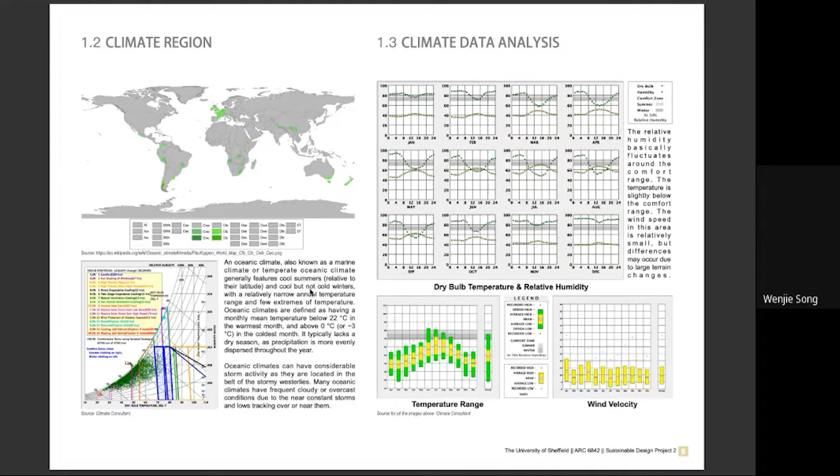We did a study about climate prediction in the future, and the general temperature had a tendency to increase by 3 to 6 degrees here. So climate change would be a big concern of our project.

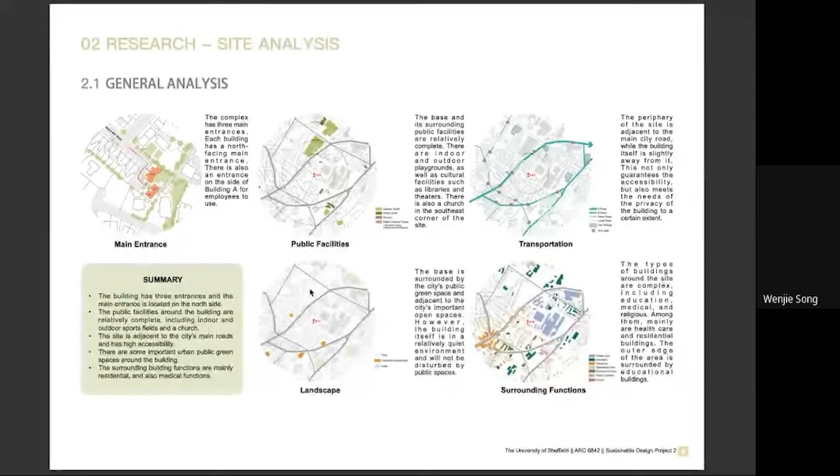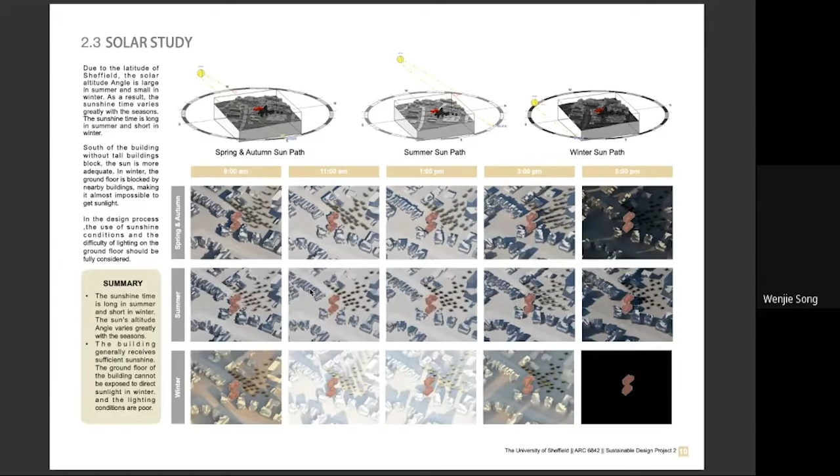Here we did some analysis about our site to help us better understand our location. Here is the ventilation condition, the wind condition of our project, and here is solar radiation. By this we can say that there are no high-rise buildings around our site, so solar energy could be used in our project.

Our project is very special, as it's for special people with long-term mental health needs. So we did some background study about mental health problems, and we can see there are 3 special needs for these people: the first is safety and socializing, and also comfort needs.

To better understand our residents, we did a daily routine analysis of our residents, so that we can better understand their daily activities in this way.

Here is a questionnaire done by MSc students, so we analyzed the questionnaire and summarized some problems in our project, such as the office being quite dark, and noise from students nearby needing to be solved. We also learned that decoration style may affect their health, so we also did a color study in this term.

Here is a solar radiation simulation of our project, and we can see that the north facade also can receive enough solar energy in this way. Our house has a quite high energy consumption originally, so this has to be changed in our project.

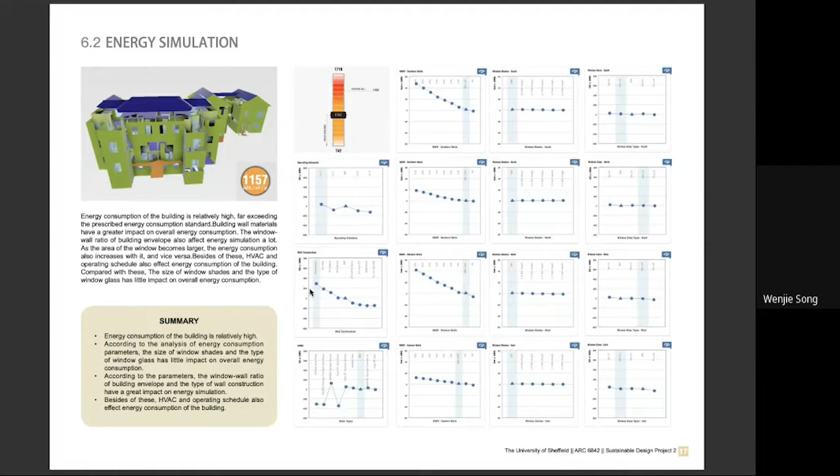Here is the daylight factor and the illuminance. We can see that the inside space of our building was quite dark.

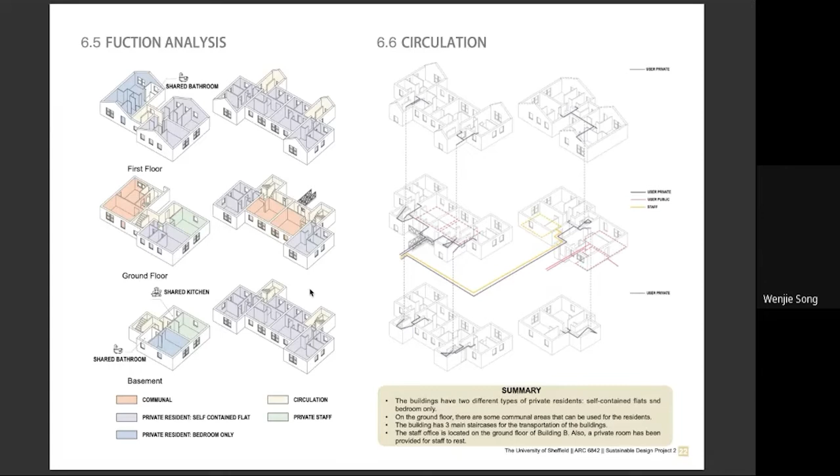Here is the function analysis. The house was built several years ago, and the function was quite simple, but the circulation was quite complicated, which is not suitable for people with mental health problems.

We also analyzed the structure because we plan to change this a little bit.

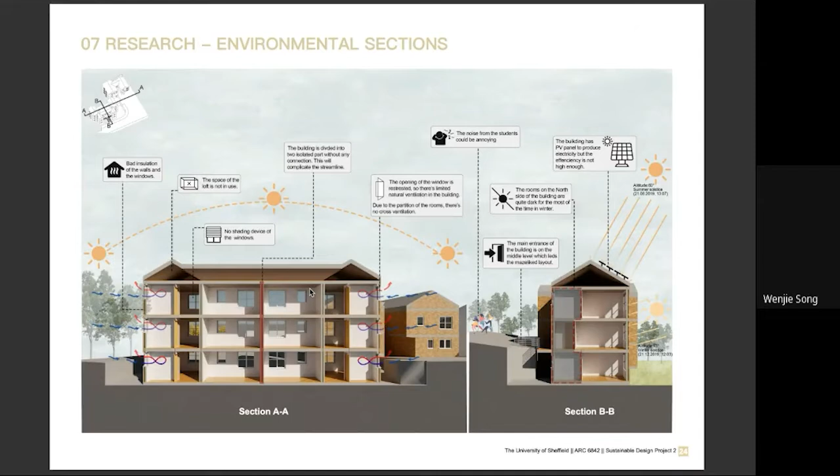Here is a summary of our building. We can see there are several problems: the building is divided into two separated buildings so people cannot go from one building to another directly, there's bad insulation of the walls and windows, and also no shading device on the windows, which would be terrible.

There is another section of our building, and these problems could be changed in our project.

So here is our SWOT, as I said before.

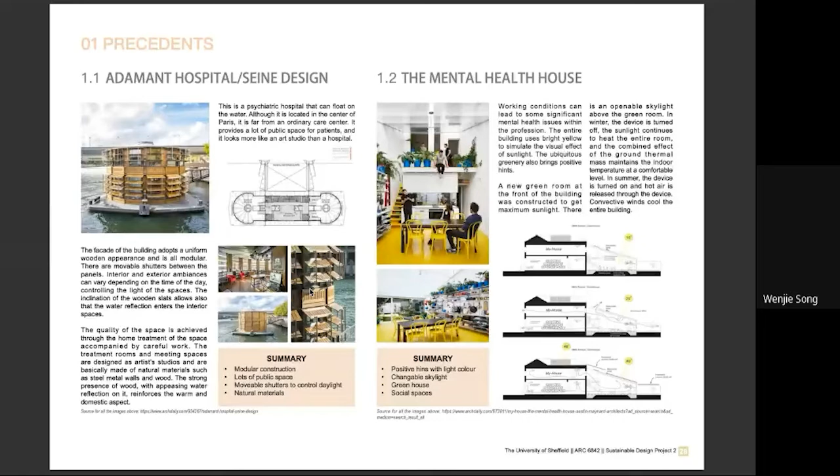We did some case studies about buildings for mental health people, and also some passive house studies. We selected BREEAM as a benchmark for our project because it combines energy, health, and some other factors in its standards.

Our vision has 6 parts. We want to achieve thermal comfort, improve indoor daylight quality, and increase variety of communal spaces, because people are encouraged to communicate more with others. We also want to achieve low energy consumption targets, ensure ventilation with safety, and finally improve water efficiency.

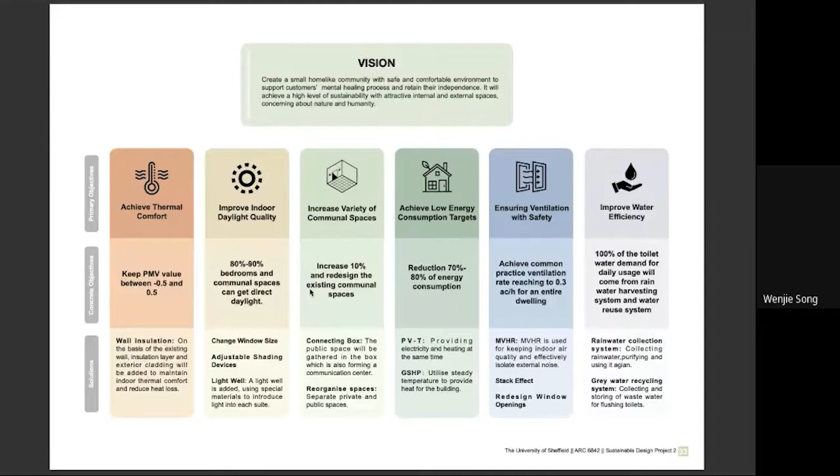Here goes the overall solutions of our project. First, we made some visual changes to our project - we added some steps and ramps on our site to make our buildings more accessible. For our layout, we also made some key point changes.

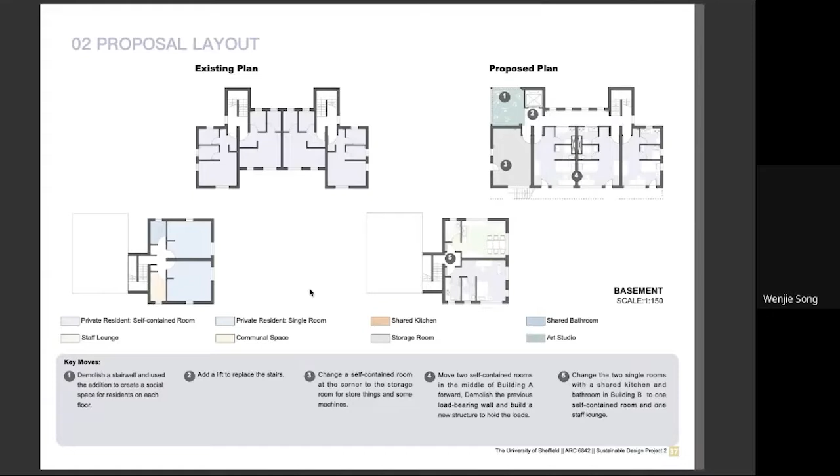For the basement, we added a storage room to store some medical machines and other things. For the ground floor, we added a glass connection box to make sure people can go from one building to another very conveniently.

For the first floor, we added some communal spaces, and we demolished the stairs of Building A, the top building, adding a lift instead. We also increased the number of self-contained rooms because of the total increase in number of residents.

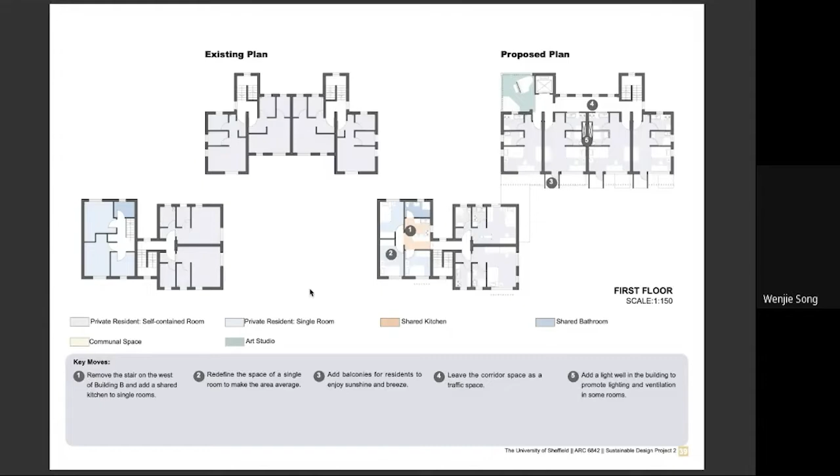Here goes a section. We can see that our building is located on a slope, so there may be some height difference between the two sides of our building. This may be an opportunity for our project.

Here are our potential solutions for our building. We want to add some insulation to our building envelope, and also add a light well in the middle of our building to bring natural ventilation.

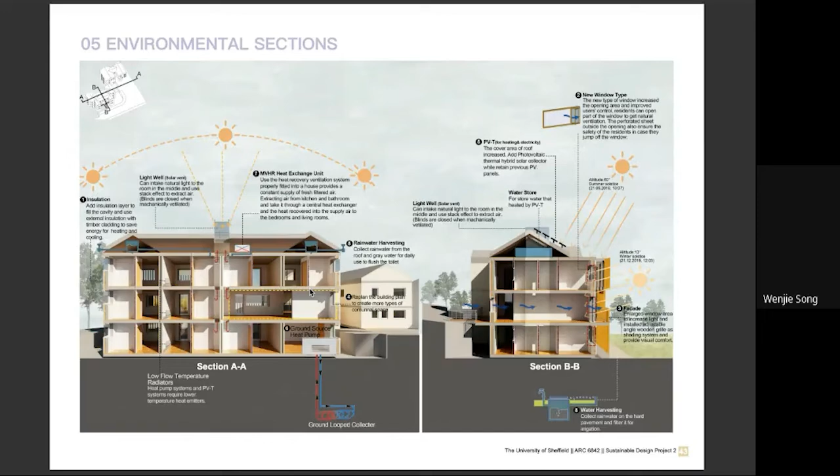We also want to introduce an MVHR system to encourage natural ventilation in our building, and a rainwater harvesting system to better reuse water. We also add some PVT panels on the roof to better use solar radiation. Now I will talk about our solutions in detail.

First is about insulation. We added insulation to our building, and we also selected to use a double facade in our building. We selected timber as the main material of the double facade.

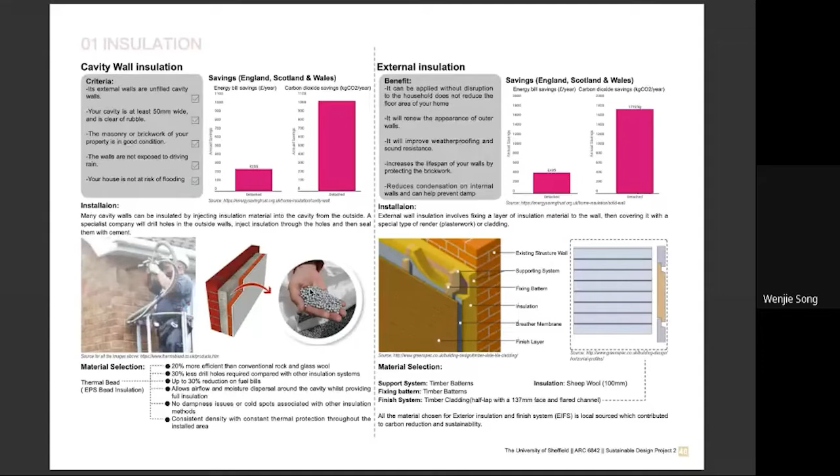Due to the climate prediction for Sheffield, general humidity would increase by 2050. So we changed the shape of the double facade a little bit to better prevent moisture in this project.

We also selected a new window type. We changed the original double glazing to triple glazing to better prevent heat loss and improve air tightness.

We also added a window box outside the building, with some small holes so that people can see each other from their own homes, to greet each other and communicate with others.

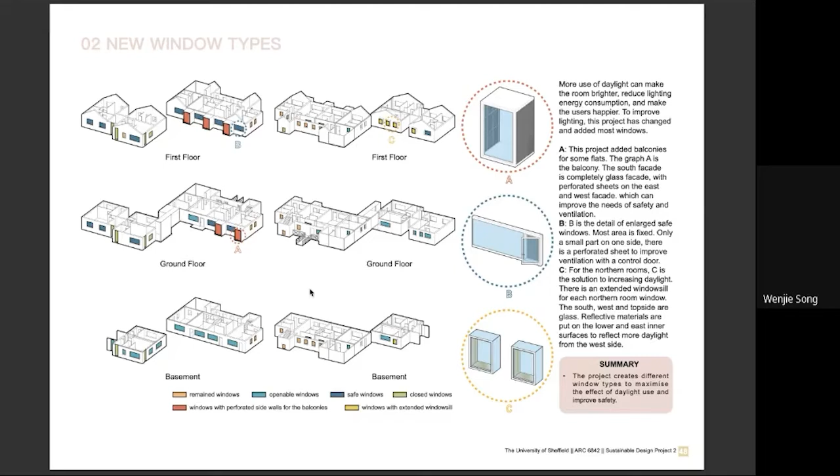We also introduced an adjustable timber shading system. By applying this system, people can adjust the angle of the shading themselves depending on their preferences. This is a detailing of this shading system.

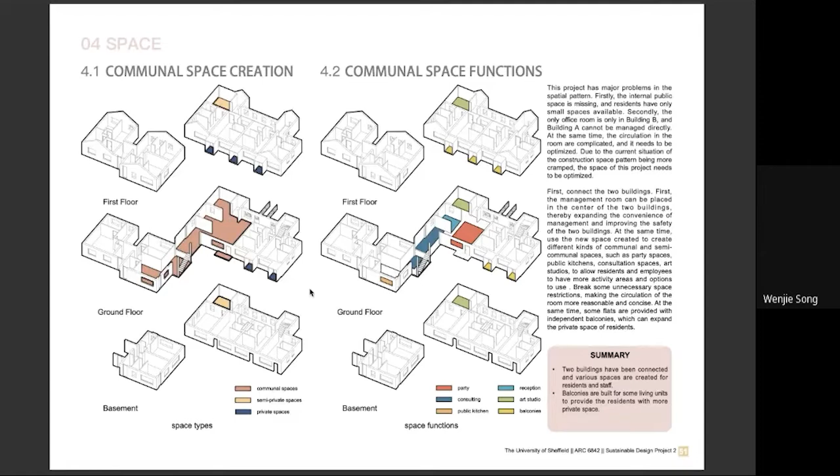For space, we added some communal spaces such as the middle connecting box, and we demolished the stairs because there are 2 stairs in our building, and we think lifts are more convenient for people with special needs. We also added an art studio in the north building, because we learned that artworks may be helpful for their mental problems. Here is some sketch about the public spaces.

For structure, because we added some big communal spaces, we changed the structure a little bit. We demolished some load-bearing walls, and instead added some columns and beams to bear loads.

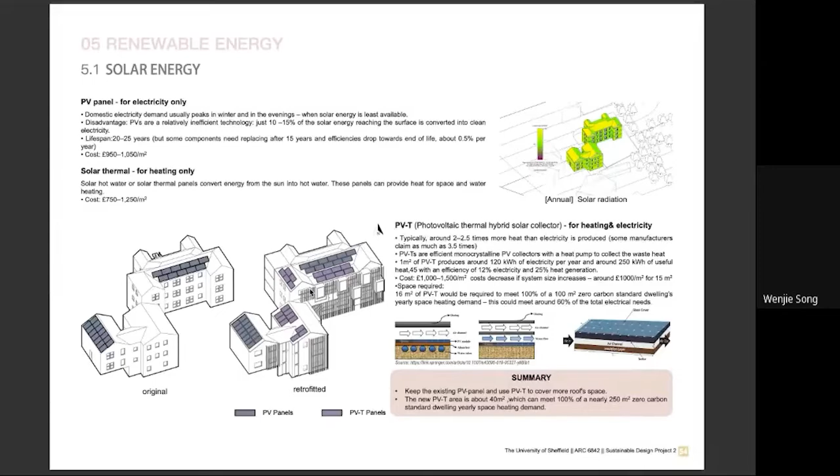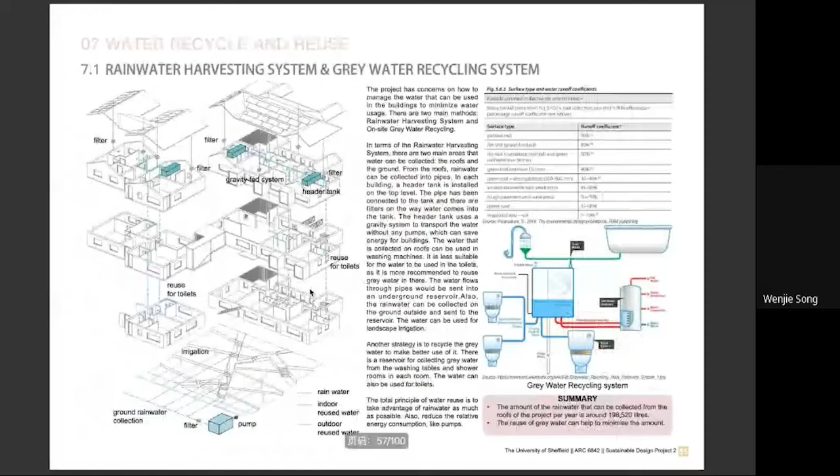Regarding renewable energy, first we considered using solar energy, because the orientation of this project was quite good and there is no shading around our site. So we added some PV panels on top of our roof, and also added a ground source heat pump, located under our garden. We also want to introduce the MVHR system to encourage natural ventilation, and apply rainwater harvesting and grey water recycling systems to better reuse water.

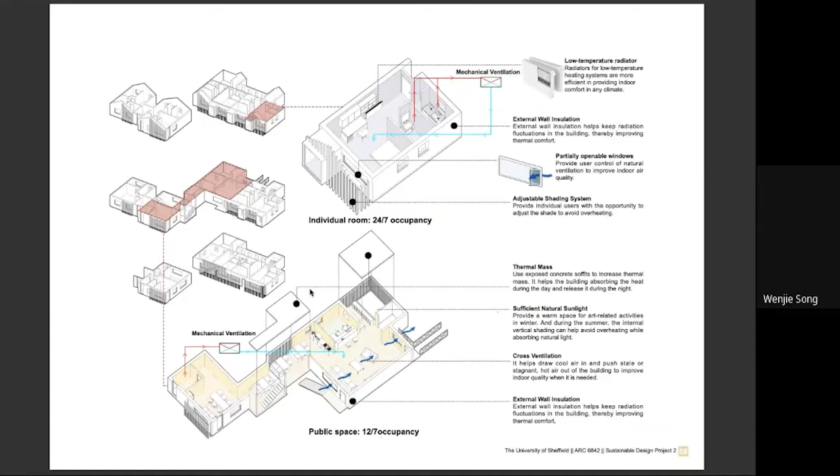For thermal fields, we prioritize the self-contained spaces, because residents would spend most of their time in their own rooms, followed by assistant spaces such as the shared kitchen, offices, and toilets. We added mechanical ventilation and increased insulation to improve indoor thermal sensation, and we also designed an artificial lighting system for our project.

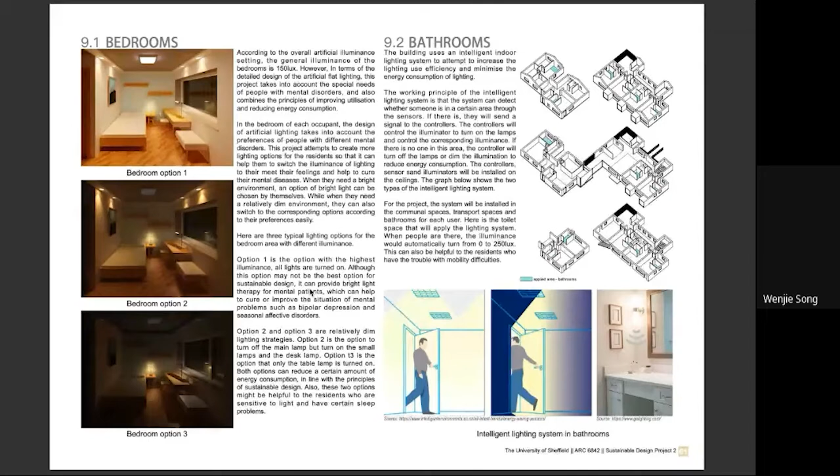As well as thermal fields, we prioritize important spaces in this building, such as the toilets, kitchen, and assistance spaces, to reduce the danger of using these spaces. In special spaces, such as the bathroom, we use an automatic lighting system so people don't need to operate it themselves, which is convenient for people with mental problems. For other spaces, we selected different types of lighting systems so people can select depending on their preferences.

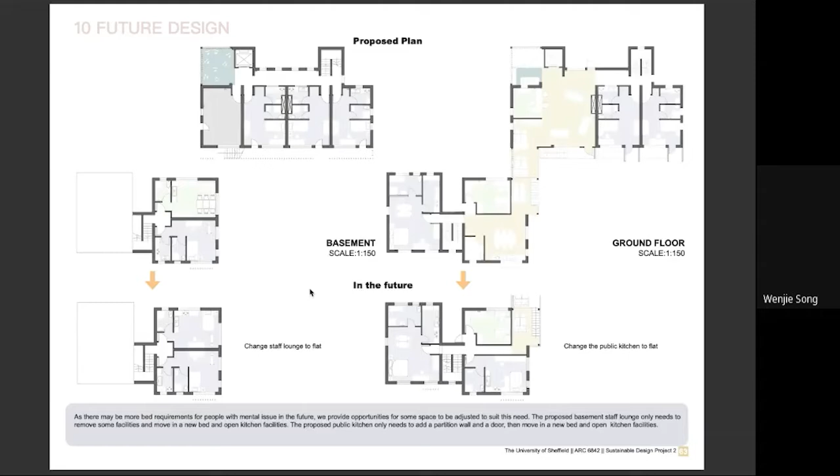We also considered future design because the total number of residents in this project was changeable. So if the number increases in the future, we designed some movable walls in this building so people can change the layout themselves to adjust to the change in numbers. We also plan to grow plants in the window boxes because of global warming and rising temperatures in the future, so these plants could prevent heat very well.

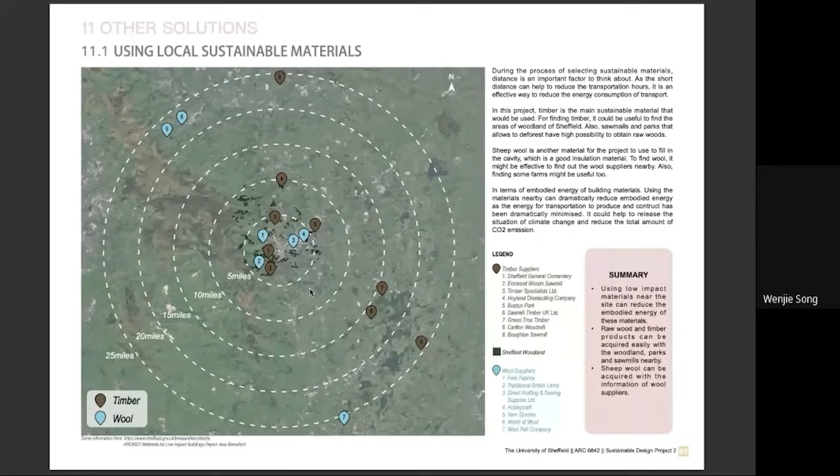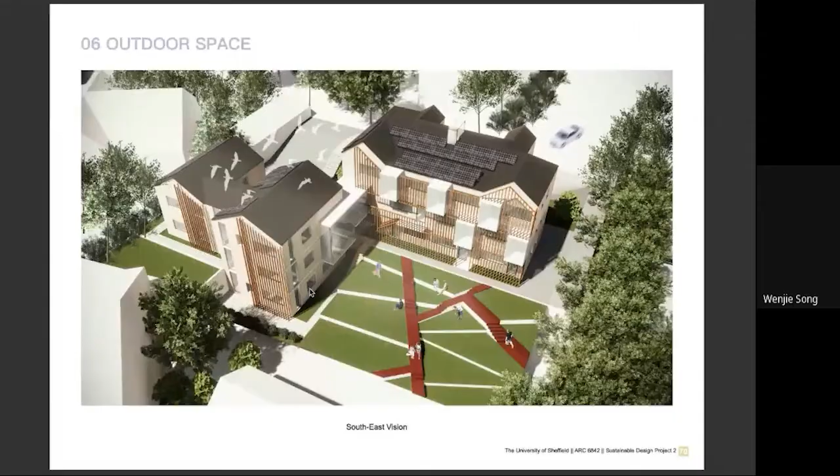Here are some visual renderings about our building. Here is the south facade, and here is the garden and the connecting box.

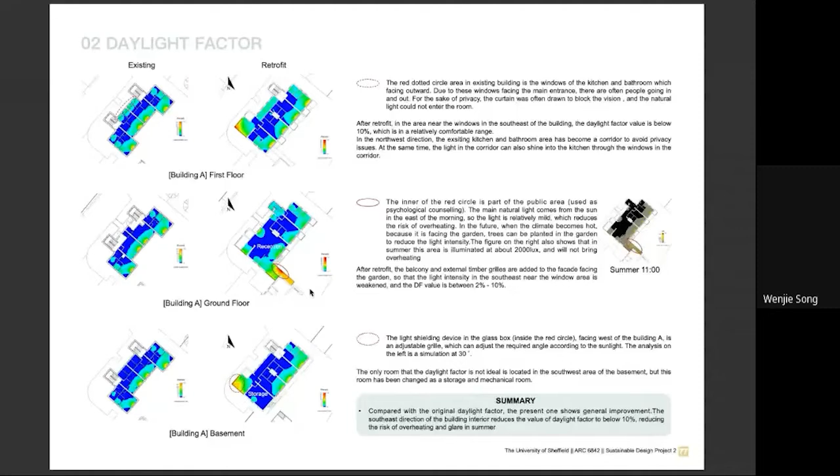After applying our solutions, we recalculated our energy consumption, and it's now reduced to 213, meeting the standard of Architecture 2030. The daylight factor has improved a lot, especially on the south side, as well as illuminance.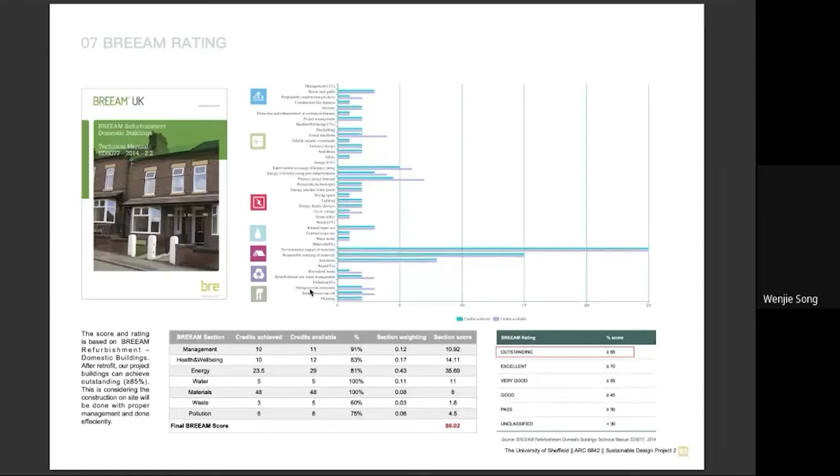We also did the BREEAM rating, and our project scored outstanding. Besides this, we also wanted to achieve the Passivhaus standard in our project. We did a lot of things, especially selecting the window and door types to improve the airtightness of our project, and we tried our best to reduce thermal bridges in the building envelope, especially at the corners of the wall.

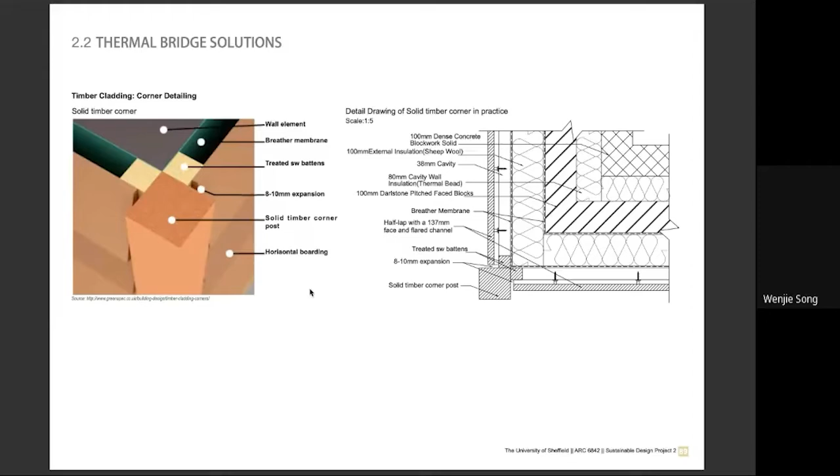We simulated our building in PHPP software, and our building finally achieved and met the standard of Passivhaus, because our house was a retrofit project - the Passivhaus standard for this was 25, and our final score was 19.8. So here is our project. Thank you very much.

Thank you, Wenjie. That was an interesting project. It was a fantastic insight into the breadth of the project you undertook and the process.

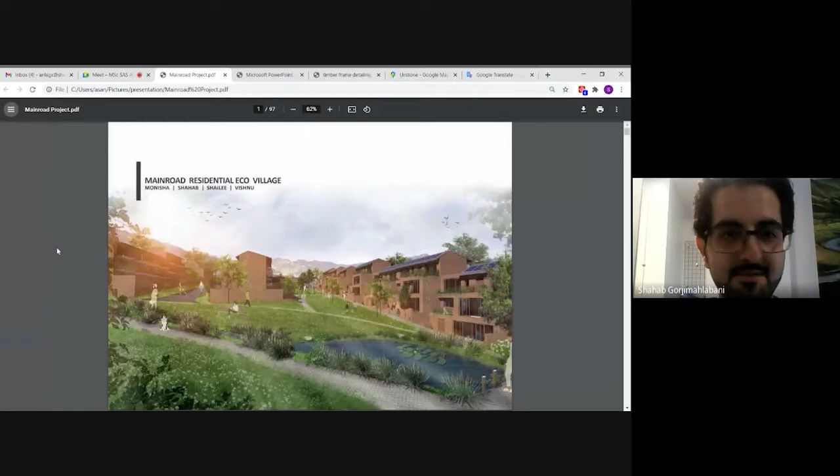Yeah, I hope you can see my screen. Yes, we can. Okay, so hello everyone, I'm Shahab, and I'll be joined by my friend Vishnu in presenting the Main Road Residential Eco Village. I'm really happy to join this session, and I hope we can transfer what we've learned throughout the project to everyone present. Just to point out, we've summarized the presentation so we could present the relevant parts, and we've omitted some parts from our project which we thought were not necessary for this presentation.

As Celine pointed out, every design in the SAS studio starts with the 7 steps to sustainability, which starts with research and looking at the background of the project, then going into the vision and objectives - what we are aiming to achieve. Based on that, we go into the solutions, the design, and the strategies, and finally we validate those strategies with physical models or simulations. We end all of that with feedback from the real project, if it is built, and from the users, in order to incorporate it into future projects.

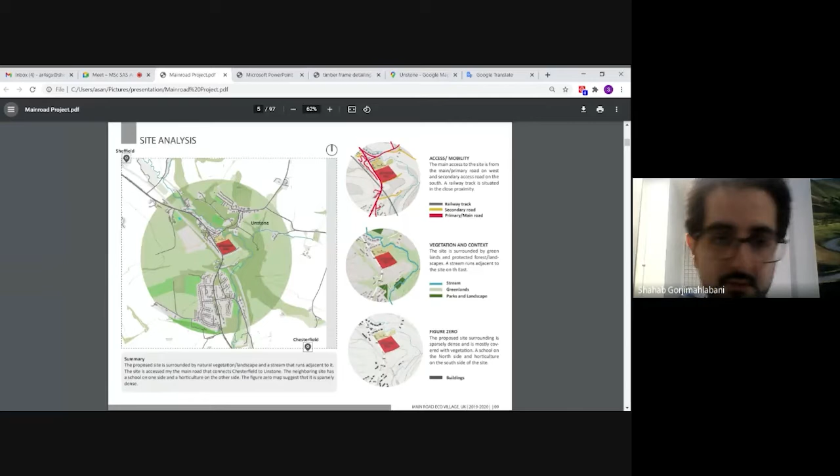We did some site analysis looking at the shading and the wind on the site. The main direction of the wind is from south to north, and also a secondary direction from southwest to northeast. The site also has two slopes, one from south to north and another from west to east with a drop of 12 meters.

These two points helped us with zoning the site, as you can see on the right. We divided the site into two parts of two segments, with a main axis passing through diagonally from the southwest to the northeast, with housing projects on the west and east sides, and also some public spaces next to the main road.

These are some views of the site. You can see the main road, the school, and also the view of the site here.

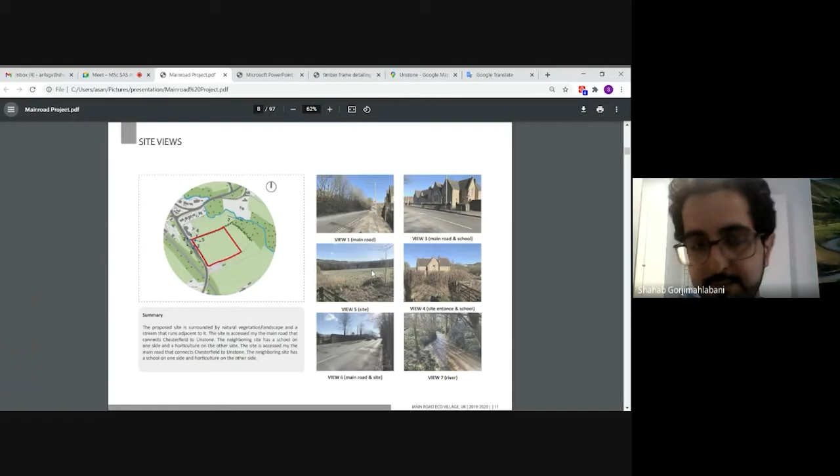The main vision of the project was to achieve a passively designed social housing community responsive to the context, which also enhanced the well-being of the users and promoted a sustainable lifestyle. Because the project is on an empty site, our objectives are divided into two levels: one at master plan level and one at the cluster and unit level.

All in all, we were trying to achieve an energy efficient site, which would enhance community engagement and also achieve sustainable goals such as water harvesting and waste management. We were also after good air quality, lighting, and thermal comfort inside the spaces, as well as good quality of spaces and good design.

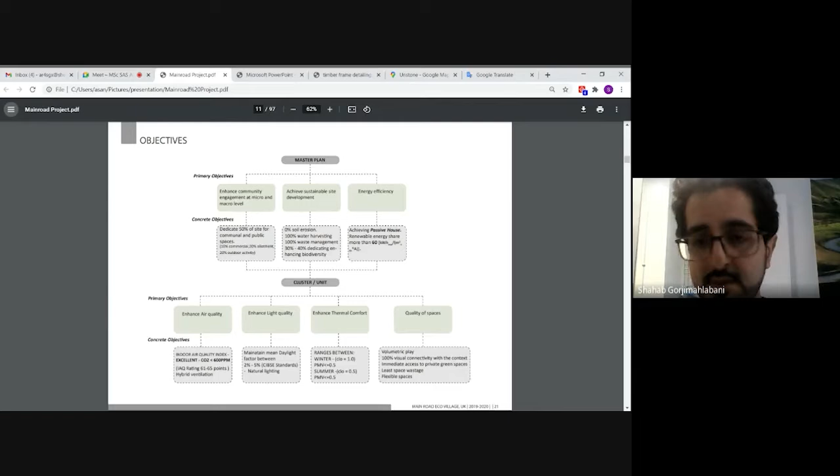I'll hand it over to Vishnu.

Before starting the design of the project, we went through a series of analysis about the kind of user group we're going to have and the community activities that would happen on site. We found out that we'll have families, couples, single parents, elderly people and single occupants, and then charted down all the activities of all the user groups.

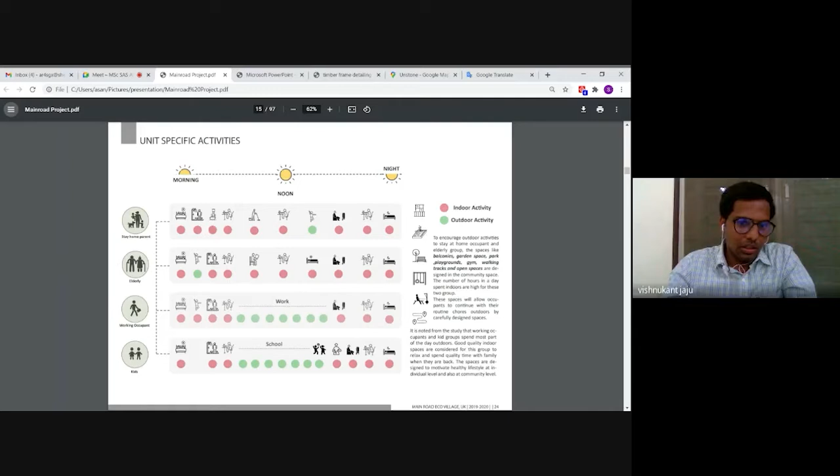We then did an activity analysis of all the users from day to night to understand the occupancy pattern. Going to the master plan, we initially started with vague ideas of how we can arrange the units around the site, since it was a slopey site, so we always had to take care of the diagonal valley we have in the site. We explored organic clusters, courtyards, straight rows, staggered patterns and earth sheltered buildings.

We then shortlisted three options. The first one being a very north-south oriented geometric arrangement, but it looks inorganic. The second one being straight lines. The third one being a combination of both, with organic lines on one side and inorganic clusters on the other side.

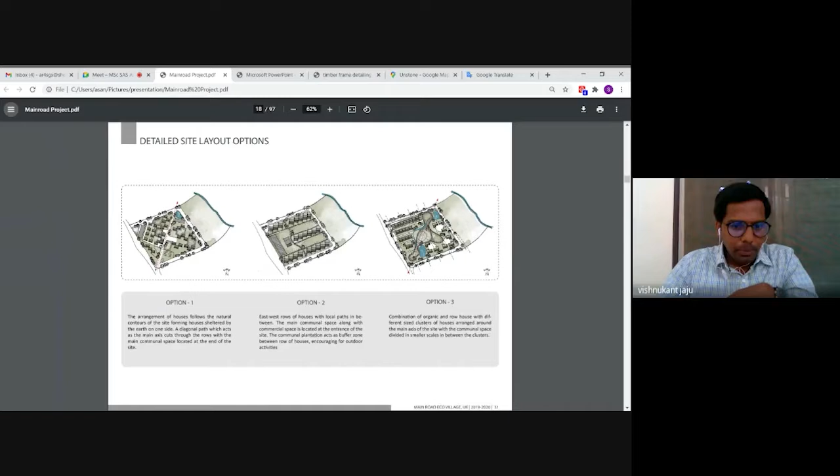We started detailing out the third one because it actually looked very interesting, and how organic and inorganic arrangements form the community space. We did an analysis of the advantages and disadvantages of both kinds of arrangements.

So that was the final layout. On one side of the diagonal, the diagonal axis became the open community spaces with the community center, and also the water body you see in the center is actually following the slope of the site, so that we are not doing any mechanical pumping of water to collect it. On the left, you see rows of houses oriented south-north, which are actually 1-bedroom and 2-bedroom units arranged one above the other. On the right, you see clusters of 3-bedroom community arrangements.

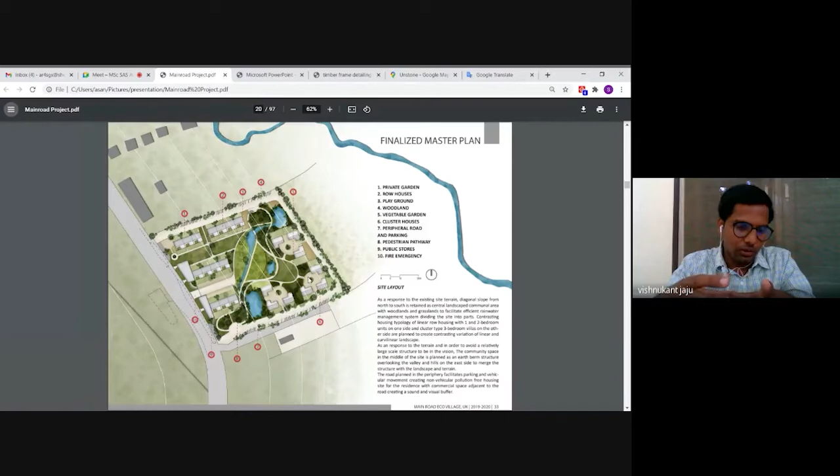That's the overall view of the site, showing how we've made parking all around the site and not in between the residential units, still having emergency access to each and every unit, and then orienting all of them to south and north so that we take advantage of the sunlight to generate electricity by solar panels.

Then, to understand how much area of the site we are using for various activities like wastewater management, rainwater harvesting, and woodlands that we are proposing on site, we did an area allotment. So we understand that.

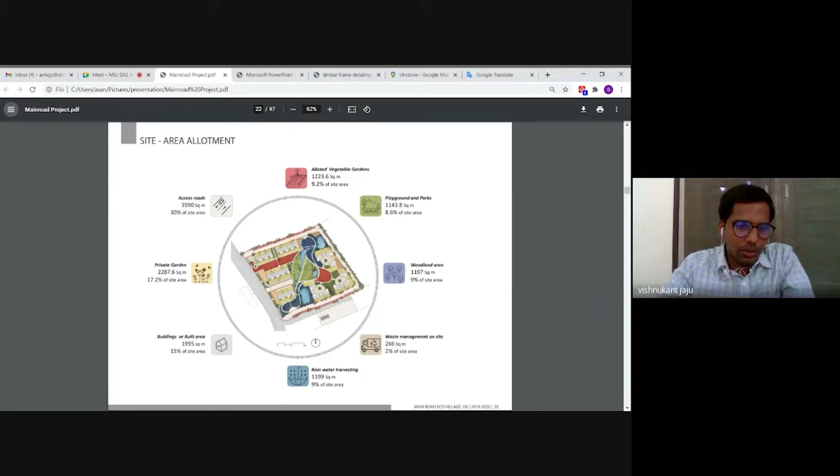That's again a detail of all the layout. Next, all the spaces in the layout.

For rainwater management, what we have done is it was 100% possible to collect all the water from the roof sheds. So we are collecting all the water from the roof of the building and putting them back into the earth by groundwater recharge units. And the centrally located swale that you see is actually following the slope of the site.

That's collecting all the water from the site. So in that way, we are trying to collect all the 100% water that we are going to get on site and pump it back to the earth, back to the ground, by using bioswales and very dry landscape in some areas which can retain water.

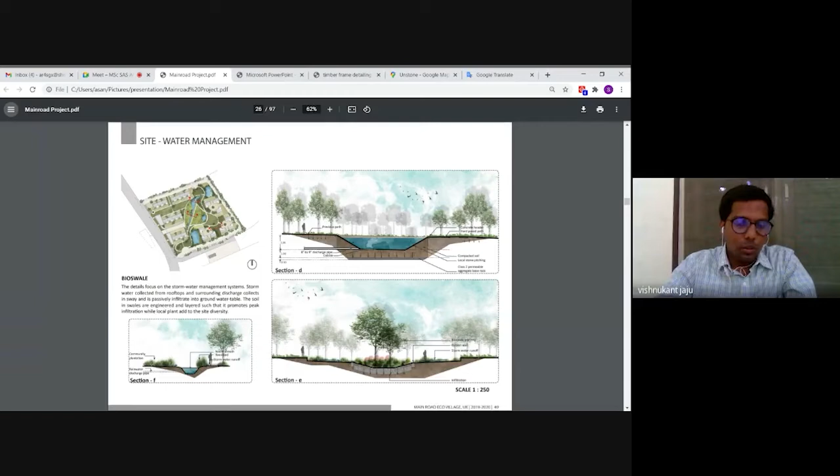You can see some detailed sections of how the swale is proposed and how the woodlands are proposed around the water body to avoid evaporation. That's a detail of groundwater.

On the right, and then in the lower section, you see the allotment areas in between the units, and how the water is again collected into the allotment areas.

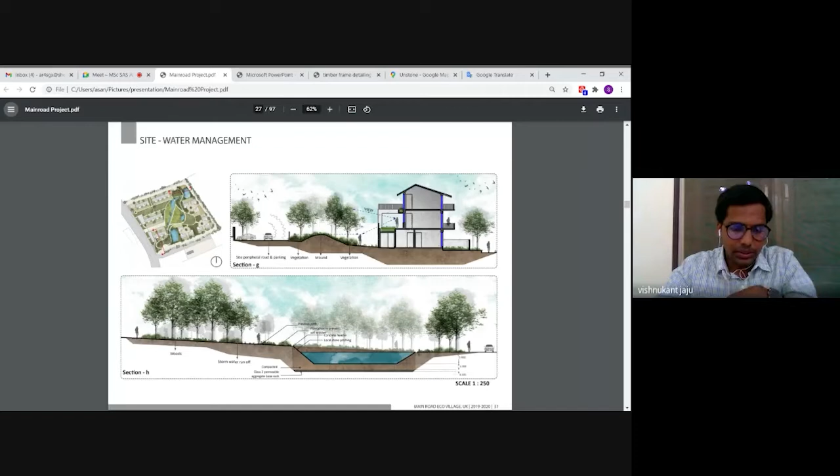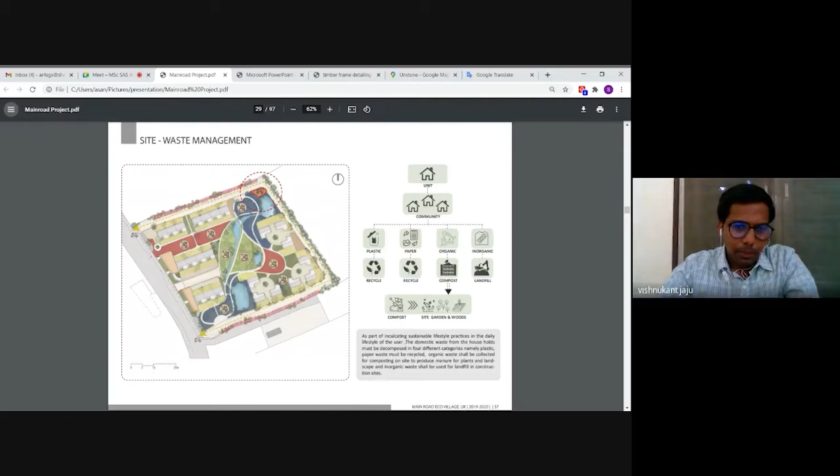Biodiversity in terms of the site itself is rich in the surroundings, so we have taken up local species of flowers and woodland trees and grasses and flowering trees, proposing them on the site, so that it grows healthily and we have a green seasonal site all along the year.

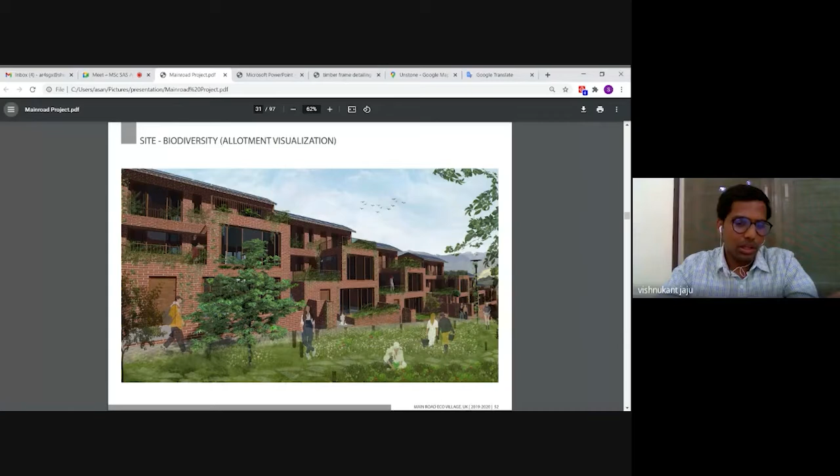Next, that's the view of the allotment and the row housing, how every building has an allotted piece of land in front of it, so that people actually use it to grow their own veggies and fruits, and also develop a sense of community in between the people.

We have gone ahead with the shape of the site without disturbing a lot of its geography. We've just gone ahead with taking the shape of the existing site.

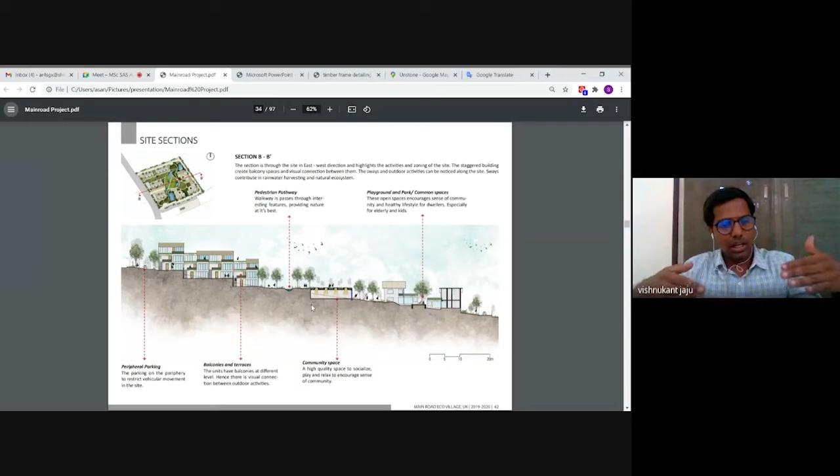What you see in the center is an earth shelter building, which is a community center overlooking the valley. So there is no structure visible when you're entering the site from the top - you don't actually see it. What you see is only residences, but you actually have a community space which is into the ground with skylighting and all of that.

This is a cross section in the other direction, where you see how we have placed the site at this particular location, so that the house behind actually receives sun all along the year, and also that helps in efficient functioning of the solar panels that we are using.

So the idea of going ahead with 3 rows was because we had to have this for 100% functioning of solar panels and to keep our spaces warm throughout the year.

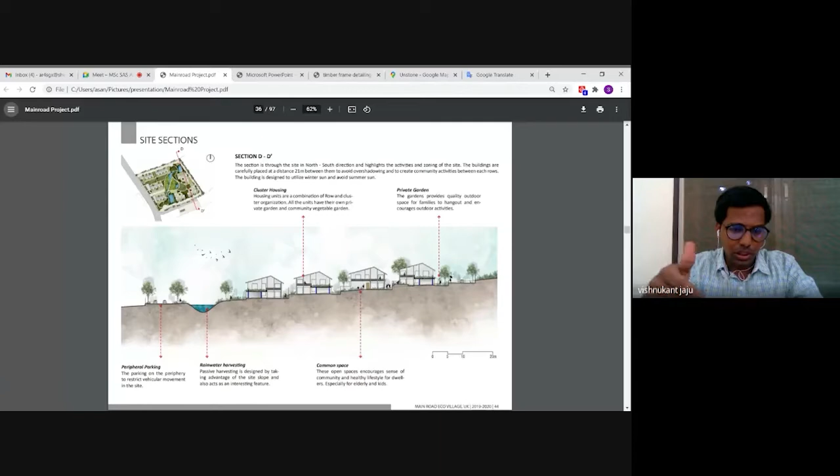Next, this is the cross section through the community clusters. Very straightforward - same, we followed the slope and swale. Go ahead.

A zoomed-in section of how we're trying to inculcate a sense of community between the people by having terraces overlooking the allotment areas, so that it becomes more social, and the sense of community is there because the architecture is creating it here.

Go ahead. That's the detail of the section of the community center, showing how we're doing a naturally lit earth-berm building. Go ahead.

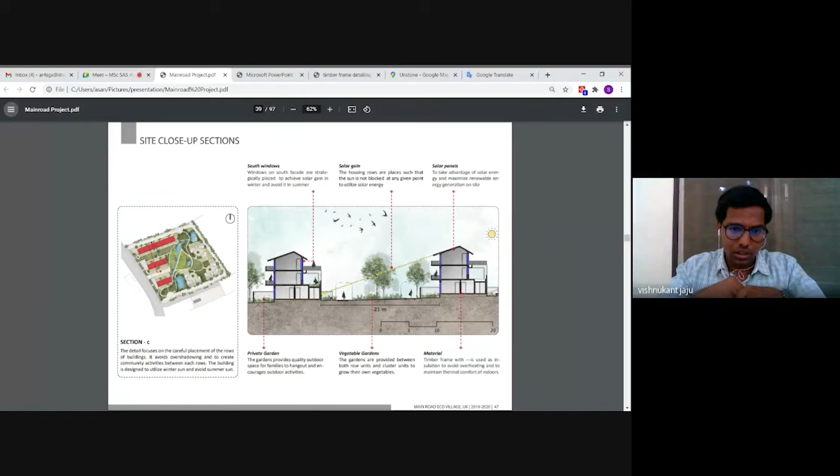Zoom in of how we've arranged the buildings for maximum utilization of sun and to keep the spaces warm, with windows and cross ventilation in the space.

So this is unit 1. Basically we are trying to play around with the form so that we could arrange everything around a cluster. It was all about scooping the spaces, having terraces overlooking each other, and how we have verandas and inside and outside space, also taking care of ventilation and natural light in all the spaces. This is a 3-bedroom unit.

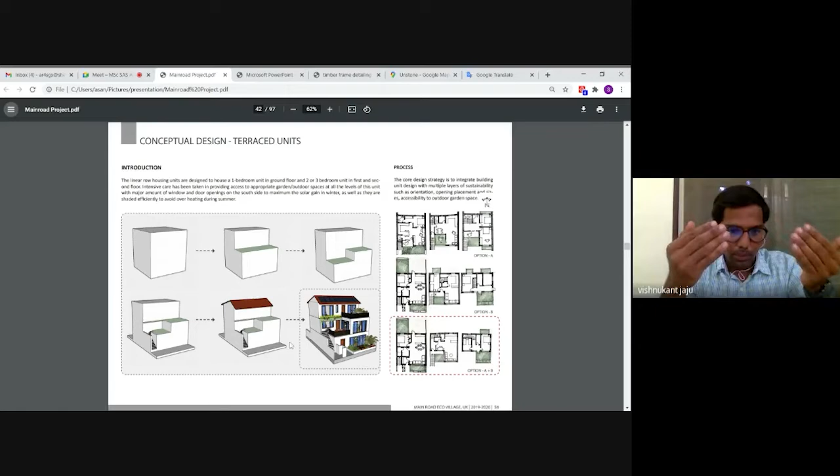This is unit 2, which has a 1-bedroom unit on the ground floor and a 2-bedroom unit on the 1st and 2nd floor, with an independent staircase going up. So we have 3 levels of terraces looking into each other, giving independent privacy on the upper levels, and the lower levels also have independent courtyards in the front and the back.

That's unit 1 with 1 bedroom on the bottom, two bedrooms on the top, stacked upon each other with a separate staircase and entrance.

That's the second unit, a 2-bedroom unit on top with two terraces, and sometimes 3 terraces attached to each other. What you see is a very simple, straightforward unit, but the real interest of the project is how we have done well ventilated, well lit, very simple planning, but amazingly functioning spaces, moving out into spaces and overlooking into terraces.

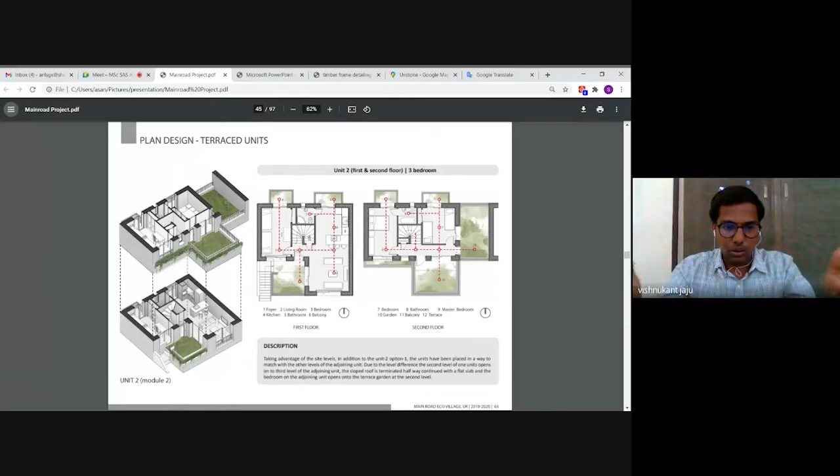Moving on into the details of the building. All of the buildings use a balloon frame system instead of the traditional system where the floor joists sit on the wall studs. In this system, the wall studs are continuous past the floor joists, and the reason we've used this framing system is we wanted to achieve air tightness throughout the building, and using this framing system makes the air tightness detailing much easier.

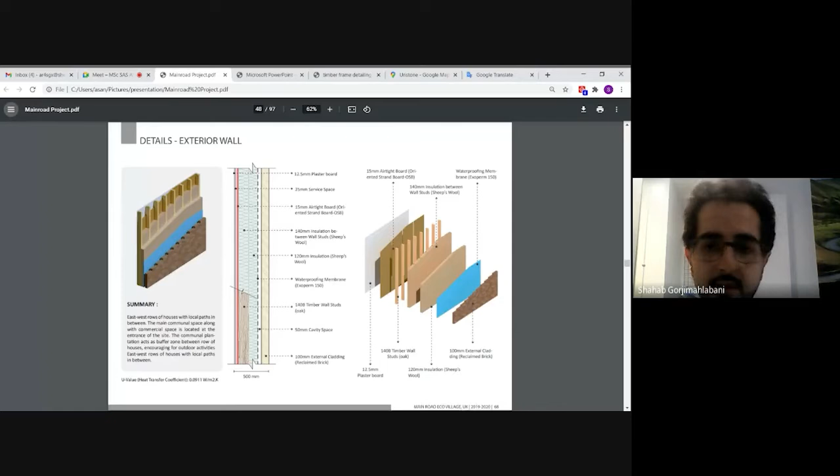The entire building uses a timber frame structure with timber trusses for the roof and clay tile roofs. Looking at the details of the exterior walls, we have 140 millimeter timber wall studs, filled with 140 millimeters of sheep wool insulation in between, and an extra layer of insulation on top in order to achieve thermal continuity. The most important part for thermal continuity and air tightness is the detailing of the joints.

So here, if you look at the foundation, it's a very simple foundation. It uses EPS insulation on the bottom and edge EPS insulation, which in addition to providing thermal insulation, acts as the shuttering for the flat slab used for the foundation. Here the floor slab and the foundation are combined, and the reason it is flat is because it helps.

It's easier to construct because these are small buildings and the workers used for these types of construction are not that familiar, not experts in very complex foundations. Also, using these EPS quick modules helps with the thermal continuity, attaching these insulation parts to the insulation of the wall.

And here you can also see that balloon framing system, where the floor joists are not disrupting the wall studs, which helps with the air tightness.

For the air tightness, we've used OSB boards instead of membranes, and the reason for that is membranes are harder to use, harder to achieve the air tightness with, and harder in detailing — you have to be very careful with creasing and not creating any holes. But with OSB, it's much easier to achieve that.

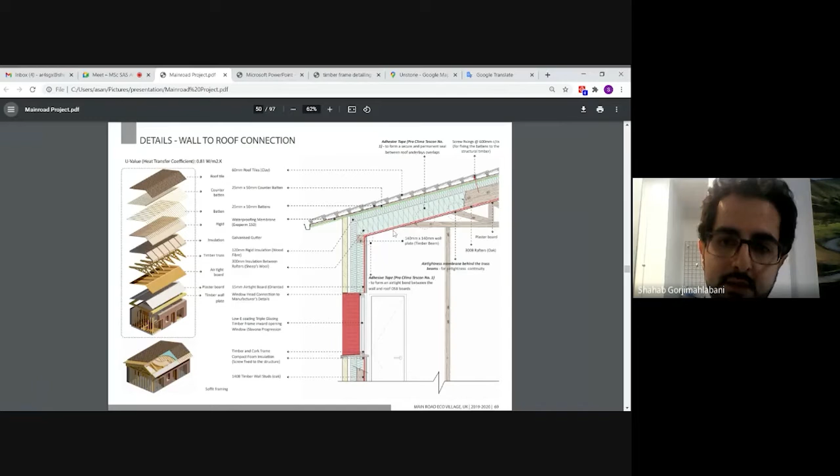Again, we've used OSB boards and adhesive tape in order to achieve air tightness between the walls and roof. This is an overall section of the building, incorporating all of those details explained. The reason air tightness and thermal continuity was important was our goal to achieve Passivhaus, and in order to achieve Passivhaus, you have to follow some steps — one is air tightness, the other is thermal insulation and zero thermal bridging.

The third and fourth strategies are using passive measures and adequate ventilation strategies. Passivhaus itself is a voluntary standard, not compulsory, but overall what it does is use a small amount of energy to save a large amount of energy. Buildings which are Passivhaus use substantially less energy compared to conventional buildings. The aim is to achieve an overall primary energy demand of lower than 120 kilowatt hours per square meter per year, and an overall heating or cooling demand of 15 kilowatt hours per square meter per year.

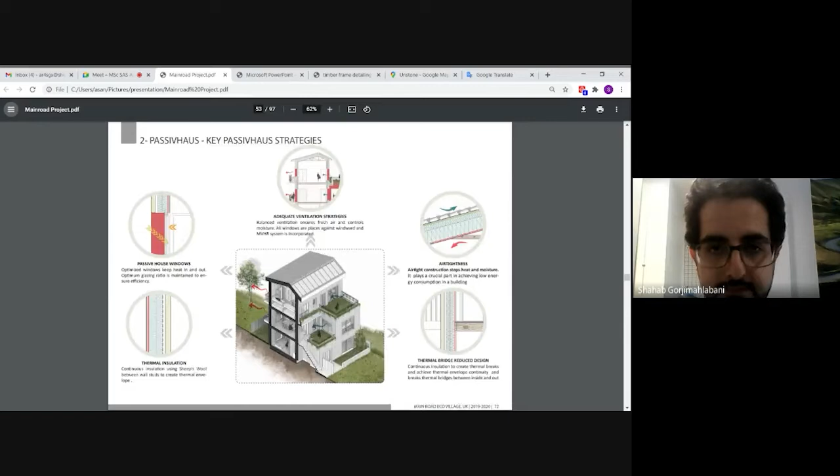These are the strategies used for zero thermal bridges and for the air tightness of the building. If you have any questions, I can go through them at the end of the presentation.

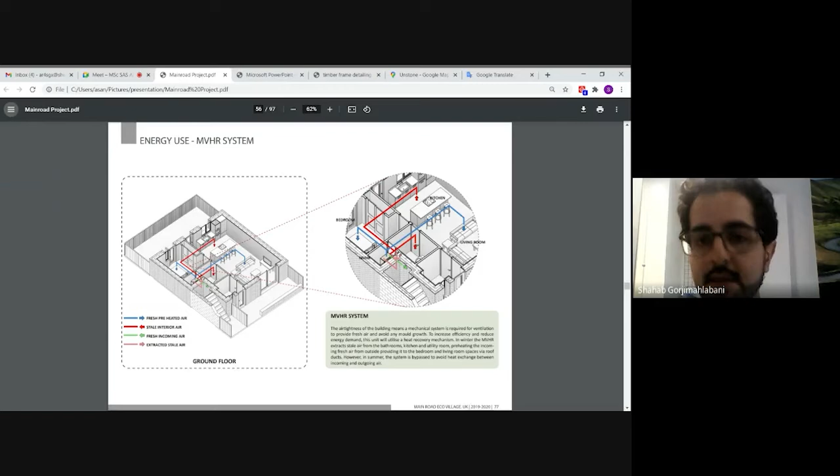The second strategy that all Passivhaus buildings use is the MVHR system, mechanical ventilation with heat recovery. Because these buildings are very airtight, you have to use a mechanical system to provide fresh air. But to reduce energy use, it's coupled with a heat recovery system, which collects stale air from the kitchen, bathroom, and so on, passes it through the mechanical ventilation system, and transfers that heat into the incoming air to reduce the energy demand of the building. This is used for the ground floor unit and also the first and second floor units.

In addition, we've also used renewable and low carbon technologies, including a ground source heat pump for heating the water used for sanitary purposes and for heating the building. The energy required for this heat pump is provided by the PV panels, so there's no need for any electricity or gas from the city. But to back up the systems, gas and electricity are provided in case any of these systems stop working or something goes wrong.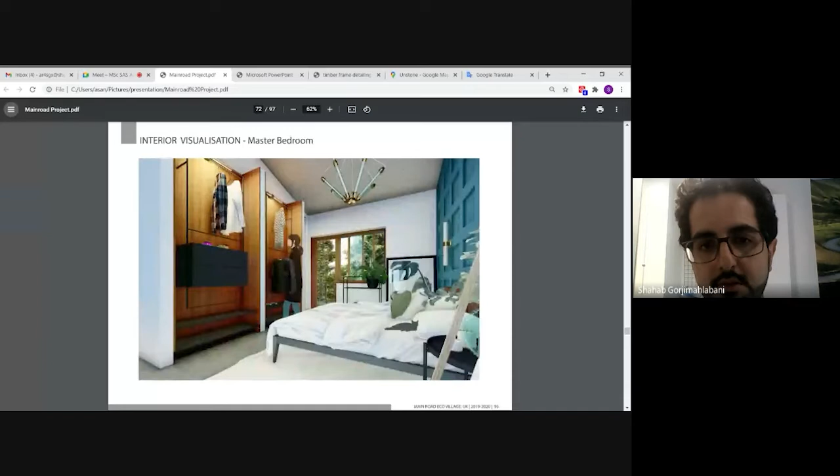The final part is the validation. Because these buildings are not built, the validation is based on simulations in Revit and IESVE. First, on the site level, we have a solar radiation evaluation, and because of the staggering of the units and the slope of the roof, we don't have any overshadowing issues with any of the buildings.

We've also looked at wind flow. There are no issues with that, and the only problem is with the south to north winds, which is resolved with the use of vegetation and trees.

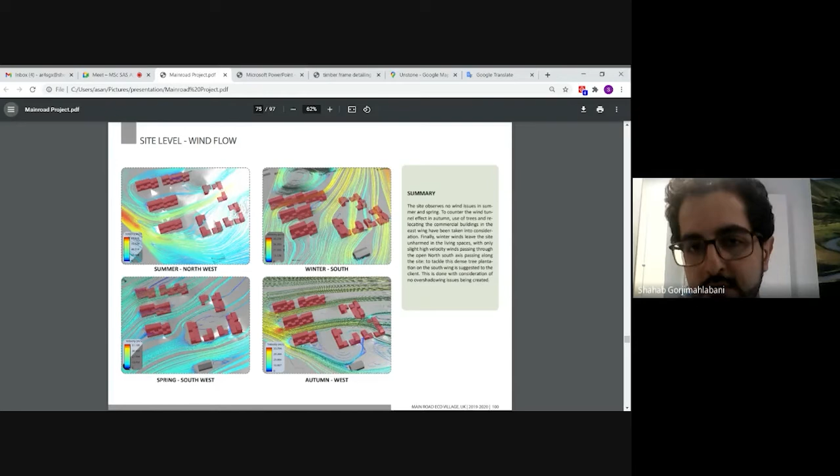We also looked at the incident solar radiation on the buildings to locate the solar panels, and the best place is on the roof because they receive the most amount of solar radiation throughout the year and across different seasons - summer, winter, spring, and autumn.

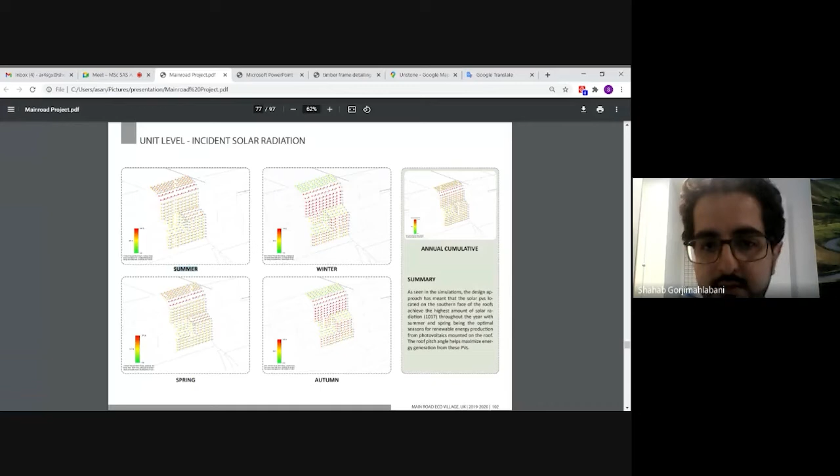Then we looked at the interior illuminance using Revit and IESVE, and as I pointed out, IESVE is better because it uses climate-based daylight modeling. Based on these, we see that all the rooms achieve a sufficient amount of daylight.

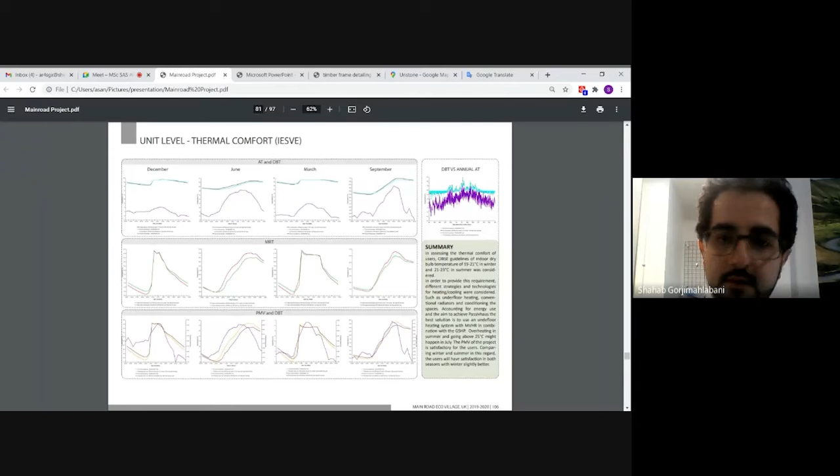We've also looked at thermal comfort and overheating issues, and the building manages to resolve any overheating issues as well.

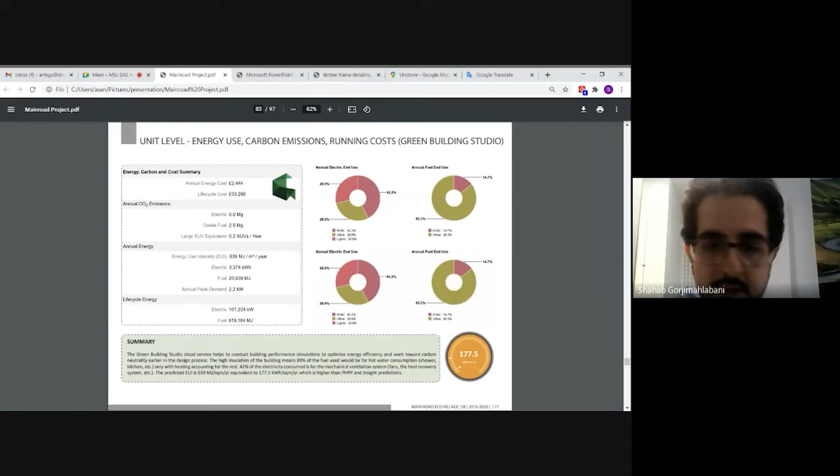For Passivhaus, we've looked at different options, different massing, and different forms for the building. The main strategies to achieve passive house standard are a very compact design - that's one of the reasons we have a very compact design - large amounts of south glazing, very low amounts of north glazing, no glazing on the east and west as much as possible, and using shading, vertical or horizontal, and also movable shading to achieve that.

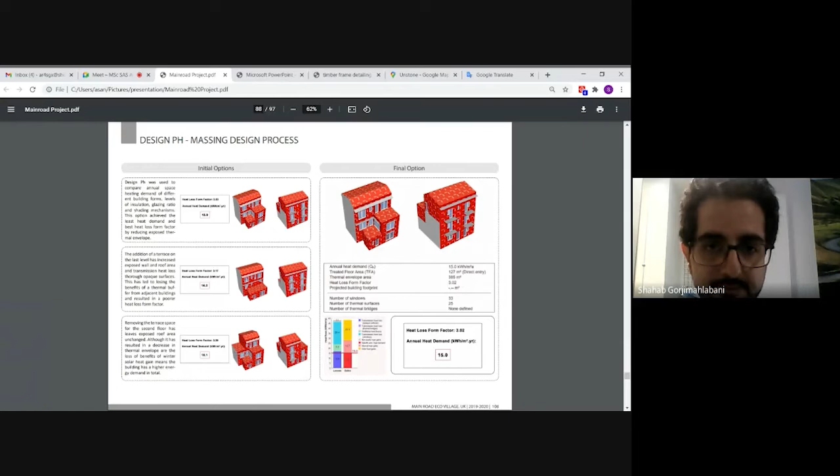I won't go through the calculations. These are calculations done in the Passive House Planning Package to see how much the energy use of the building is, how much the treated floor area is, and the thermal envelope, and also the glazing area. These are the results, and in all of the units we have managed to achieve the standard requirements.

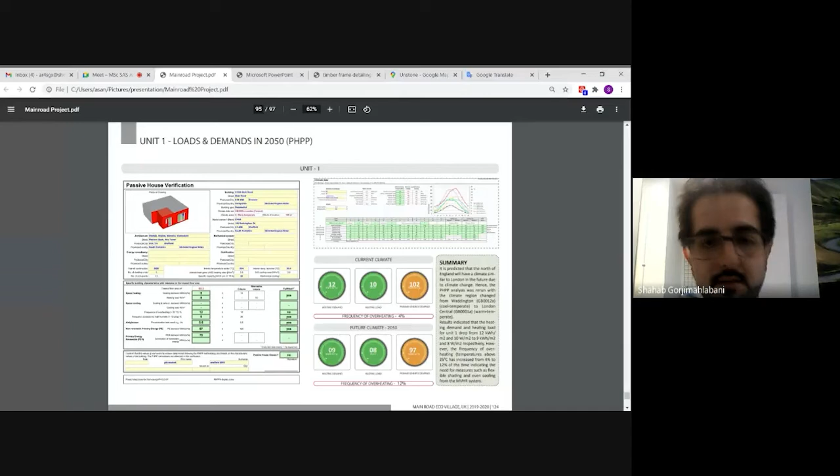And in the end, we looked at the future climate in 2050. North UK, England will in 2050 be much similar to London. So going through that again and looking at what happens, the heating demand of the building reduces, but the frequency of overheating increases. And in order to resolve that, we have to use ventilation and also different shading mechanisms. Thank you very much.

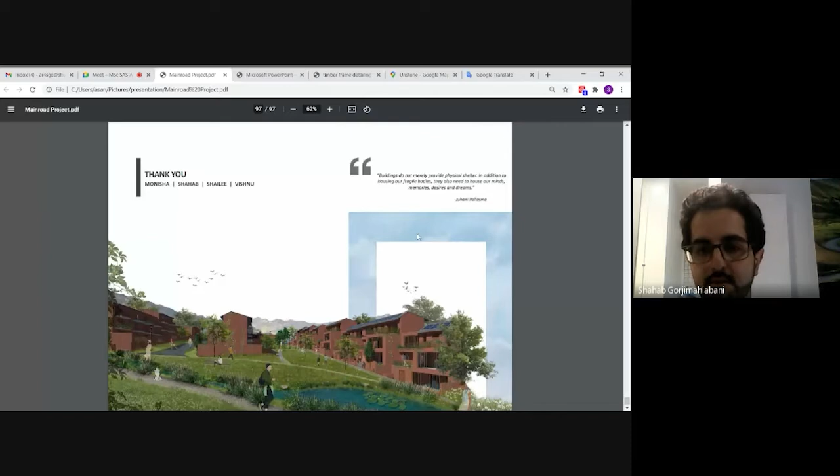Gary is asking, based on your studies, are there any relationship or correlation between the energy being used in the building and the existing thermal heat of these buildings? And what is the best advice in reducing the thermal heat of the building?

Yeah, if I go back to the presentation, give me 1 second, sorry. So in order to look at what happens in the building, if you use Design PH, which is a plugin for the software that we use, it helps with the heat loss and heat gains in the building. The main thing is, if you want to reduce the energy demand of the building, you have to reduce the heat loss and also reduce the heat gains. And in order to achieve that, you have to reduce the glazing ratio on the north, east, and west sides, but increase the glazing ratio on the south in order to increase the heat gains.

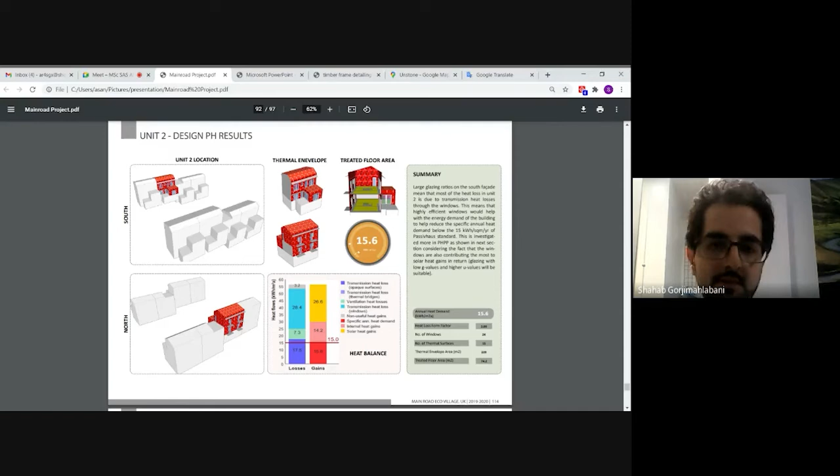But this is a balance. If you increase it too much, you have too much heat gain. But if you don't have enough glazing, you won't have enough heat gain. So you have to balance the amount of glazing ratio. And in order to do that, you have to use software such as Design PH, and also passive measures such as orientation, shading, and the roof slope, and so on. Hope that answers Gary's question.

There's another one by Jamil. What participatory methods did you use to engage them in the design process to help them appreciate or understand better in terms of sustainability and design?

So we had regular meetings with SIA. First of all, they presented us with their goals and what their overall company view is about sustainability and so on. And based on that, we did our design, and then we had regular meetings with them, presenting our results and also our simulations, and then getting their feedback on what they want to achieve and how we can achieve that in a sustainable manner. I don't know if Vishnu has something to add.

Just a small example of how their suggestions changed the design. Initially, we had a single staircase block which was being shared by 2 units on the upper levels, but generally the issue in this kind of housing is who is going to maintain that staircase block. So there you are again inviting a third party to maintain the block. So that's why they said no, we're going to go with every unit having their own independent staircase, but then they have their own responsibility to maintain their staircase. So that kind of helped us go ahead with practical reasons of buildings not being maintained if the staircase and common amenities are shared.

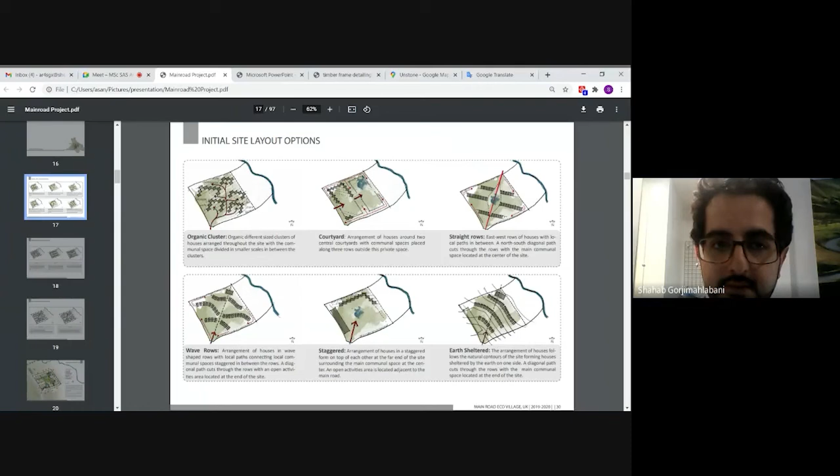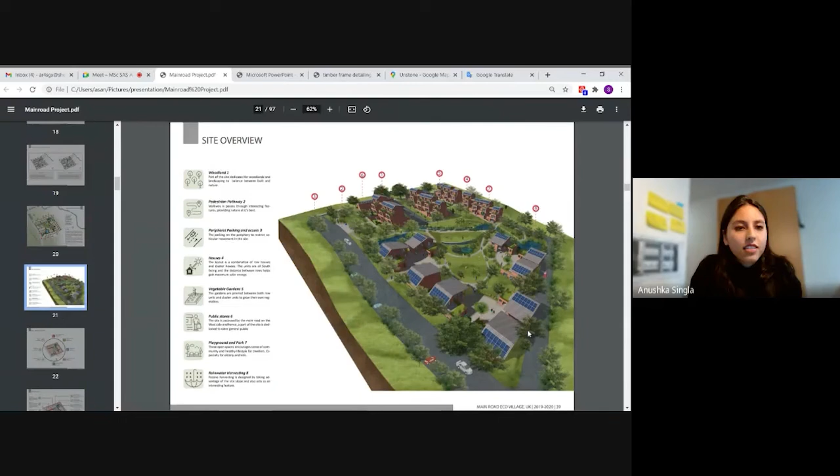I think you're speaking about the master plan, yeah? About the final site plan, Shahab? I'm talking about the clusters—on the site plan you have 2 different types of clusters, so the performance of those clusters.

Definitely the clusters that are attached to each other perform better, because then we only have north and south surfaces of the building acting to heat up the space directly from the sun. Whereas with the cluster of independent villas, all four surfaces are open, so that tends to have more overheating issues.

But again, it was a suggestion from the SIHA to have this third typology not connected to the others, because it commercially works out better for them—they get to sell it as an independent villa and gain an economical advantage. So we kept those buildings unattached, but still achieved our target of less than 15 kWh per square meter per year.

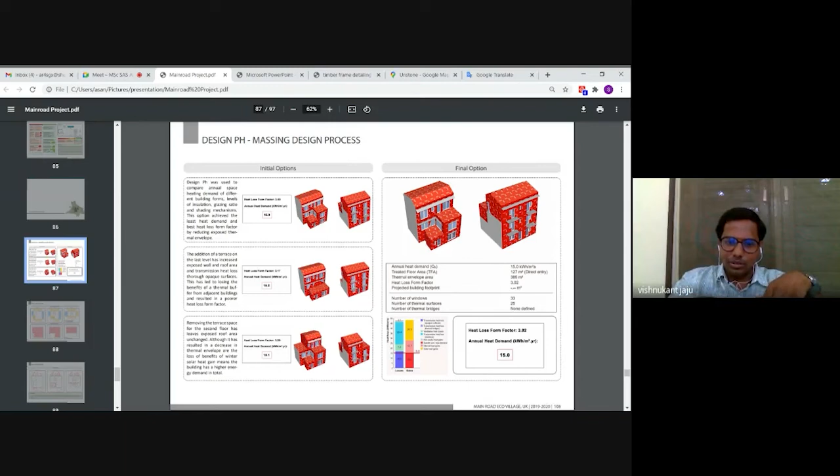What's important in passive house design is the heat loss form factor. If a building has all four facades exposed, it's really hard to achieve a low heat loss form factor. Even in the terraced houses, which are compact and all connected to each other, even a slight change in form changes that factor and the heating demand. So incorporating passive house principles does create limits on the forms you can use and on design flexibility, but it's something you have to work with—it's a give and take.

As Vishnu pointed out, both units managed to achieve our aim. Great, thank you so much.

Any more questions? This is the last 2 minutes. Anushka had asked about the earth-sheltered building, the community space. We actually haven't gone into detail to simulate that building and understand its energy requirement, so we're not in a position to talk about that right now. We selected only one unit, the row housing unit, to detail out all the simulations.